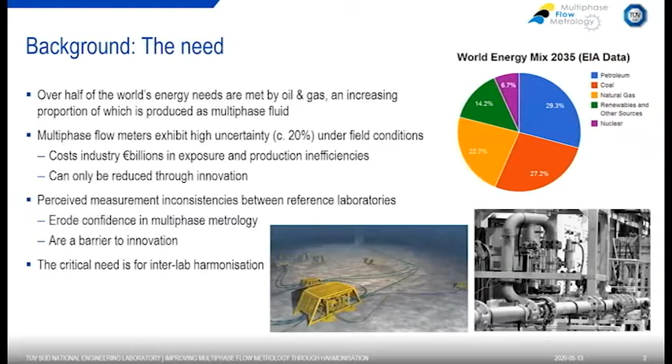This project is MultiFlowMet 2, Multiphase Flow Reference Metrology 2. It's funded by EURAMET through EMPIR, and it follows on from a previous project, MultiFlowMet. The aim is to establish a reference network of multiphase labs that are consistent and comparable, so that you can take a multiphase flow meter to any of the labs and know you will get the same results. This will lower the uncertainty of measurement and increase confidence in the use of multiphase flow meters.

Another aspect of this project is to carry out fundamental research to develop various modeling techniques for significantly improving the characterization of multiphase flows. As part of this, full-scale parametric experiments were performed to directly inform the analysis and testing for the intercomparison process.

The project started in June 2017 and ends at the end of this month. It includes an advisory board of stakeholders, including oil companies and regulatory bodies. There is a project website, just search for MultiFlowMet.

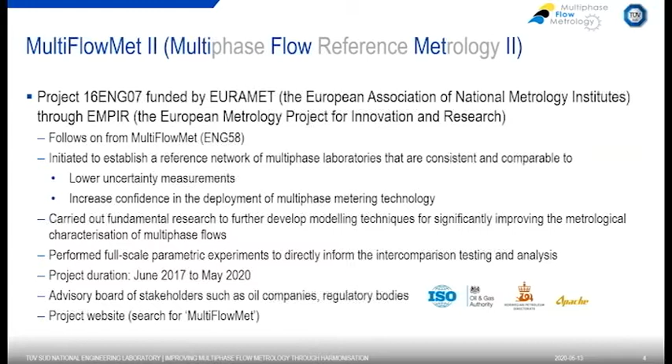The participants: in the UK, we have TÜV SÜD NEL Limited, who I work for, University of Glasgow, Coventry University, University of Leeds, Cranfield University, Industrial Tomography Systems plc, and Petroleum Software Limited.

In Germany, we have PTB and Rosen. In the Czech Republic, we have CMI. In the Netherlands, DNV GL. In Finland, VTT. And in Norway, Norce, OneSubsea, and Roxar Flow Measurement.

There are representatives from the National Measurement Institutes or designated institutes, which are VTT, PTB, CMI, and ourselves. The multiphase flow labs included are NEL, DNV, Norce, and Cranfield University. Overseeing the test work and analysis are the independent arbiters, from the University of Glasgow and VTT. The instrumentation developers are ITS, Coventry and Leeds universities from the UK, and Roxar from Norway.

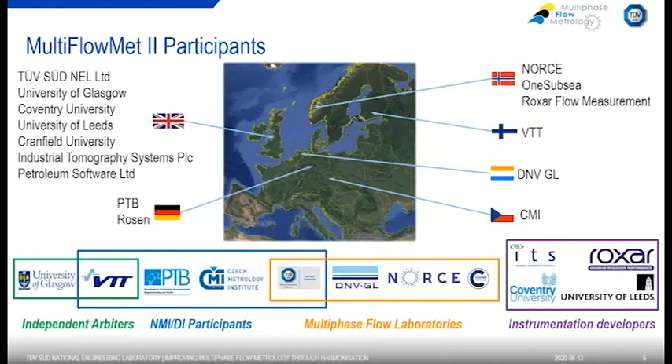The work has been divided into 4 technical work packages. Work package 1 is the preparation for the project, which involves the protocols, test matrices and methods, as well as the logistics for moving the instrumentation between sites.

Work package 2 is the intercomparison testing itself, to quantify interlab measurement consistencies or variances. Work package 3 is the research and modelling aspects, looking at enhancing the understanding of the character of multiphase flows. Both work package 2 and work package 3 feed into work package 4, the analysis, which combines the intercomparison measurement data with all the flow pattern evidence, the research and testing from the previous work packages.

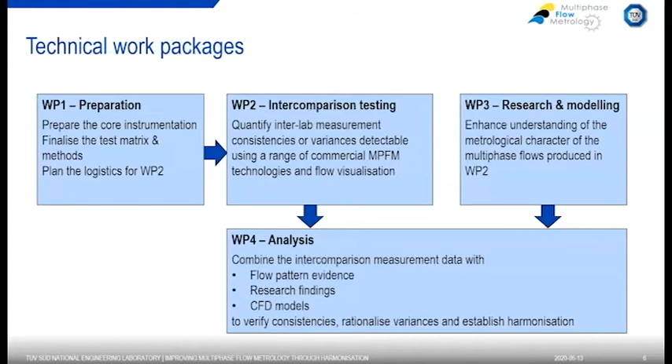To begin with, we'll look at the intercomparison specification, design, and instrumentation build, which is preparing the core instrumentation, finalizing the test matrix, and planning the logistics.

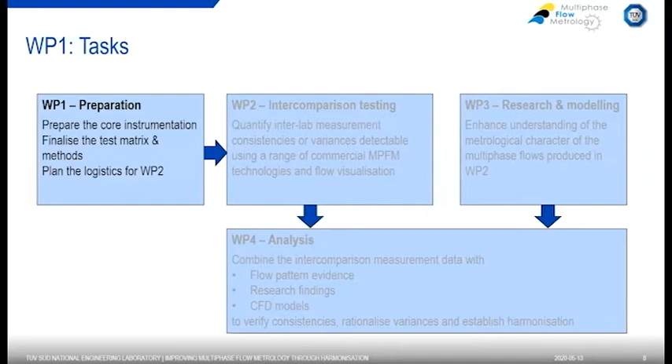First of all, we need to design what we call the transfer package, which is the instrumentation package to be transferred between the laboratories for testing, comprising the multiphase flow meter and the flow visualization equipment. Then there's a logistics plan for shipping between laboratories, which was non-trivial because it involved radioactive sources.

Then there's developing documents to ensure consistency. There's the test protocol as to how the tests were set up and run, including the roles and responsibilities for all the parties. Test facility uncertainty calculation methodology is very important for the analysis later on, and we devised test matrices for each laboratory, and of course data control for handling, storage, access and security aspects.

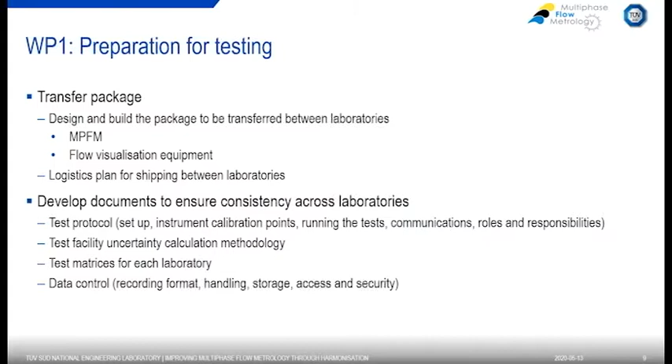So this is a drawing of the transfer package. The core is the multiphase flow meter, which is installed as standard within a vertical orientation downstream of a blind T.

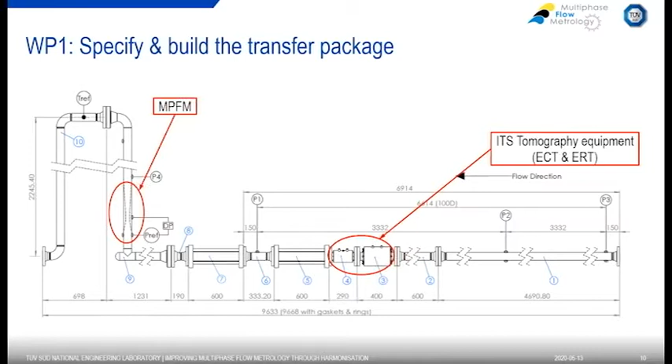As well as that, the blue pressure transducers were set to record at 40 Hertz to provide any additional information, and the green ones were reference pressures and temperatures that were monitored at all the laboratories.

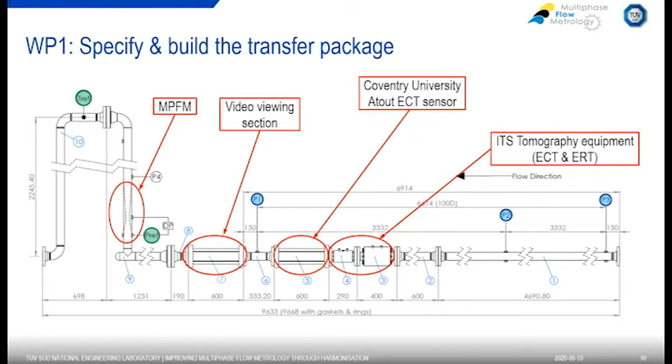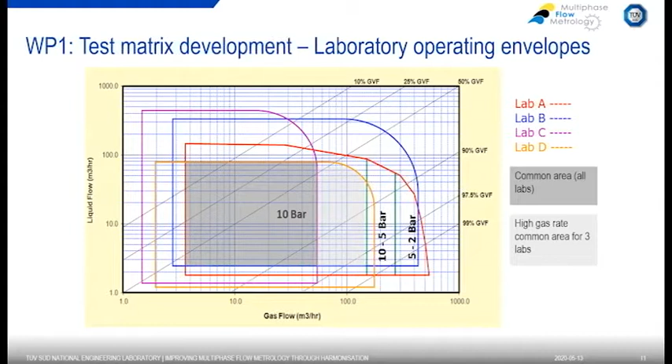Then superimpose on that lab B's capabilities, lab C, and then lab D, and then the common area. There is a common area for all the labs where the testing can always take place. But there's also another area of interest with the high gas flow rate, which is a common area for 3 labs in this case. Of course, it's important that any testing area can be tested by at least 2 labs.

And then from this, the test points are specified, and the number of points will depend on the available timeframes and budgetary limits.

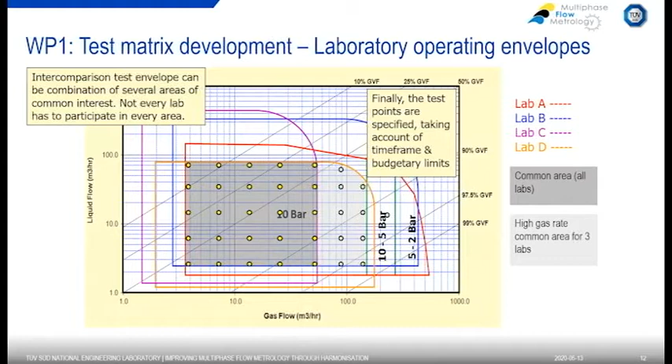For the laboratory fluids, all the labs were testing with nitrogen, and they were all testing with a sodium chloride solution of the same density. But the oil was different for each laboratory, so it's very important to compensate for the different oil characteristics to get comparable test matrices.

There was a lot of work done in MultiFlowMet I on matching dimensionless numbers. There's never going to be a perfect match between all loops due to difference in oil types and limitations in operating ranges, but focusing on matching the Froude number is the key aspect.

So there's the best match of Froude number via pressure, and matching the oil Reynolds number via temperature, using temperature to modify the viscosity of the oil. And then all the labs were using a set salinity.

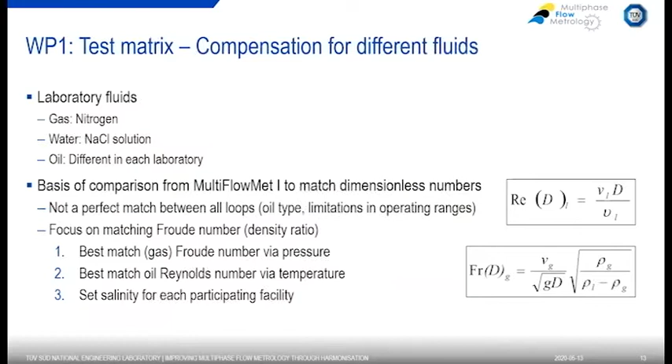For the flow pattern determination techniques, there were a number of different ways of doing this. In the transfer package itself, there was equipment from the industrial tomography systems, University of Coventry, and the high-speed video and the pressure recording.

The ITS equipment included electrical capacitance tomography at 100 frames per second, which measures gas and oil. The resistance tomography section at 800 frames per second measures the water and oil, or water in the non-conductive phase. And then there's software to combine this data to measure the full spectrum of gas, oil, and water phase fractions across the diameter.

The University of Coventry has the Atout electrical capacitance tomography section recording at 1200 frames per second, which is their research tool, clamped on externally around a perspex viewing section. We've also got high-speed video at 240 frames per second, the pressure recording at 3 locations at 40 Hertz.

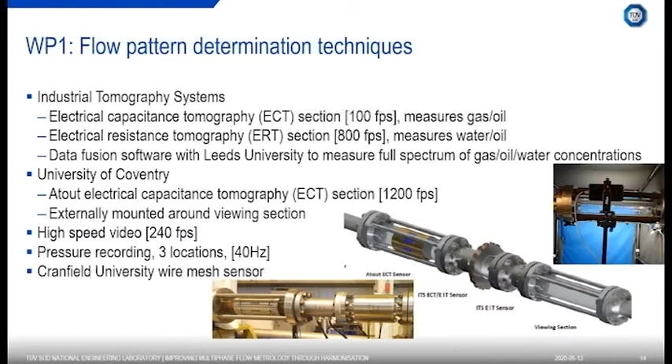Additionally, for the Cranfield University tests in Work Package 3, they used a wire mesh sensor as another tomography instrument.

So a little more about the tomography and the principle. Basically, sensors are placed around the pipe wall, and selective pairs of sensors are energized, and the field distribution is measured.

For electrical capacitance tomography, the sensors are not in contact with the fluid, and with the resistance tomography, clearly the sensors have to be in contact with a conductive fluid.

So both Atout and ITS determine the permittivity in the ECT for the oil and gas distribution, and additionally ITS determine the resistance for the water-oil or water-gas distribution.

They also have to take reference values for the test fluids, and then they use some extremely complicated mathematics to reconstruct the image from the values recorded. And from that, they get the phase concentration.

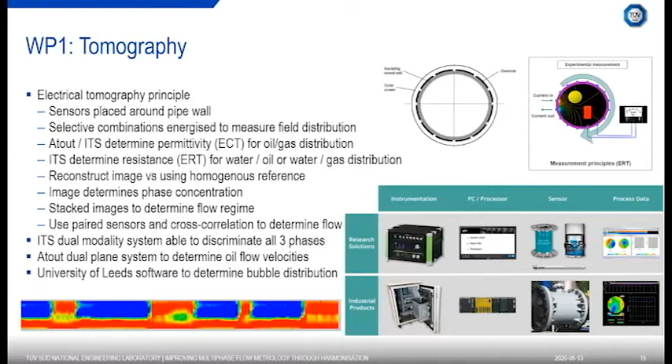Both ITS and Atout have research solutions and industrial products, and we were using the research versions on these tests.

One of the other aspects that we used was high-speed video recording. I'll play the video of this test in real time. It may well be pixelated when it comes across to you because it's a very big file, but you should be able to see the slugging flows.

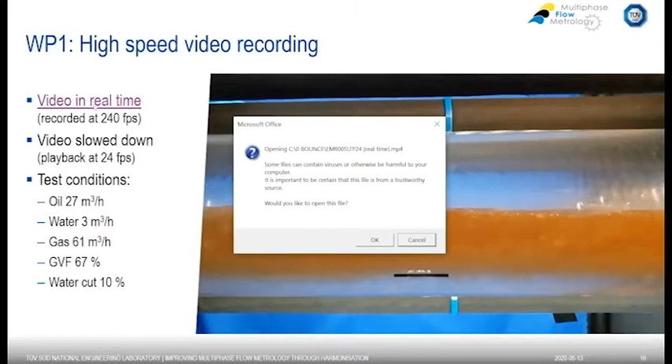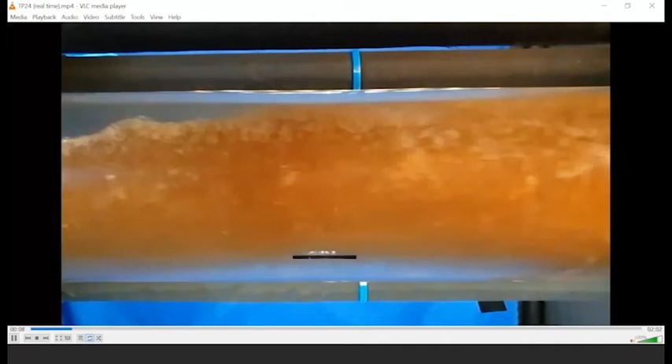So this is in real time. You can see the slugs passing through, and then the stratified flow in between the slugs.

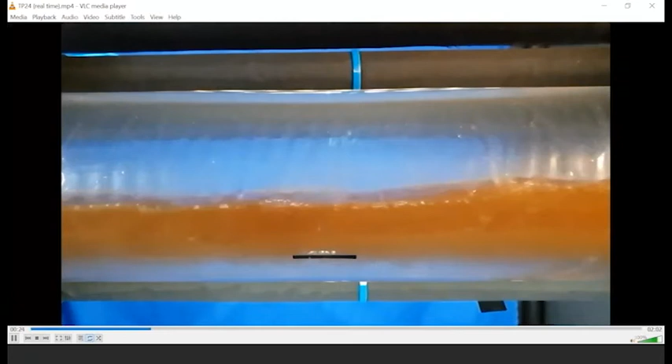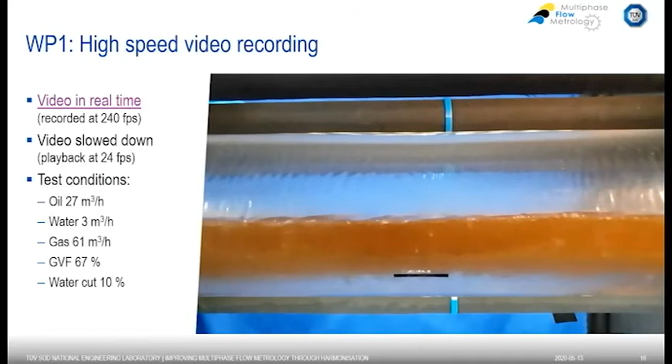And then this is the video slowed down and played back. It's the same test, the same video, playing back at 24 frames per second. Hopefully this will not be pixelated, and it gives a much clearer definition of the interface between the phases.

The test conditions here were a gas volume fraction of 67% and a water cut of 10%.

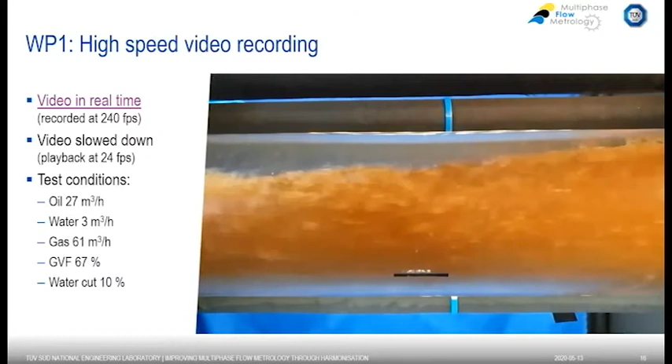So onto the intercomparison testing program itself. This was to quantify the interlab measurement consistencies or variances.

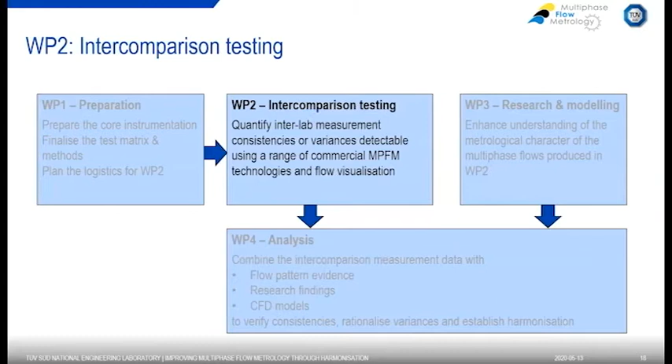The transfer package was built and commissioned at NEL, and the first round of tests was undertaken at our laboratories as well. It was carried out at 9 and 4.5 bar G and at a controlled temperature of 45 degrees Celsius in order to get the viscosity correct.

Once the tests were complete, the transfer package was dismantled and packed and dispatched to NORCE in Norway, where tests were carried out at 4.5 bar G and ambient temperature.

The rig was broken down again and transferred to DNV in the Netherlands, where they conducted tests at 8 bar G and at a controlled temperature of 18 degrees Celsius. Then the transfer package came back to NEL for repeat tests at the full test matrix at 9 bar G and 4.5 bar G as before, and at 45 degrees Celsius.

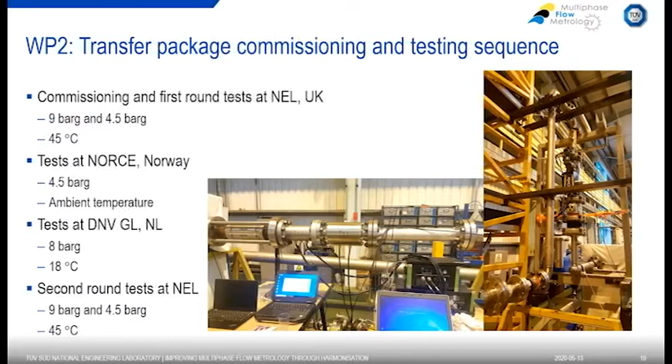The test matrices - the high pressure test matrix comprised 97 test points and was looking at a range of flows, as you can see on the right, from high to low gas volume fraction and from high to low liquid flow rate.

The low pressure test matrix was 48 test points and didn't cover quite as large a range. You can notice that some of the higher liquid flow rates are missing from the test range, and that was primarily because of the pressure drop through the transfer package.

The maximum flow rates achievable were determined during the first round of testing at NEL, and that influenced the matrix set points.

It was anticipated that it might be necessary to remove a number of test points from the test matrix during subsequent test rounds at the other laboratories if the test points were found to be outside their operating capabilities.

The intention was to run the test matrix in the same order at each participating facility to avoid the introduction of any additional uncertainties as a result of hysteresis of flow pattern development or transitioning from oil continuous to water continuous conditions. In practice, this was not always feasible due to the different operating principles at the three laboratories.

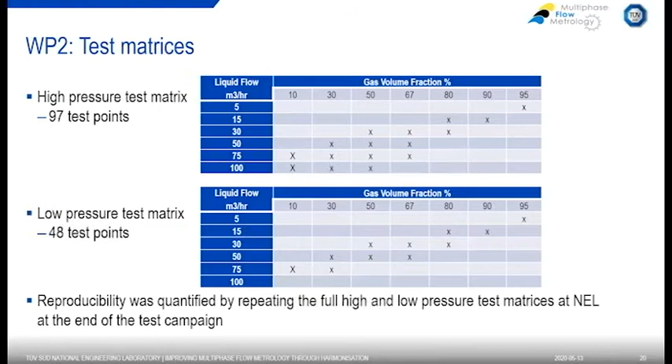Then on to supporting research and modelling.

This was carried out to enhance the understanding of the character of the multiphase flows and look at how it varied by altering different rig configurations, etc.

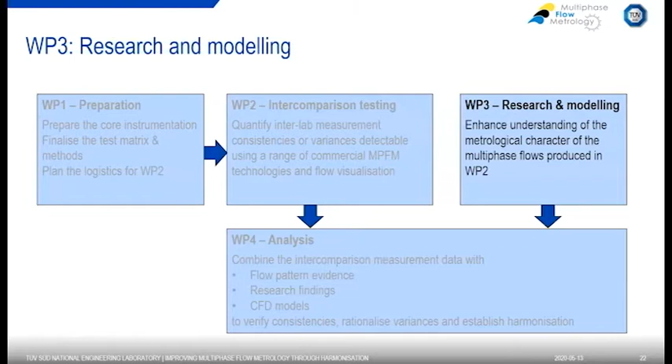So the points looked at were 0D, which was just upstream of the viewing section, 100D, 300D, and 600D. At each point where feasible, there was injection from the side and injection from underneath.

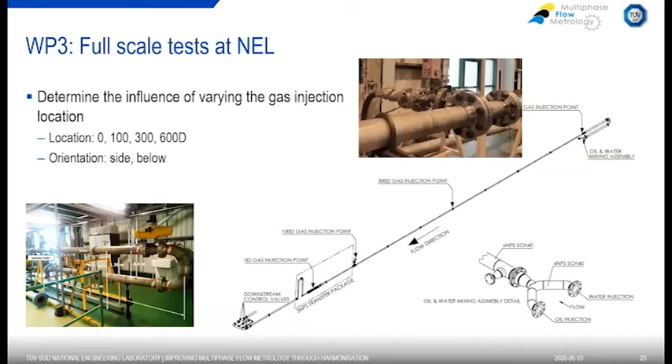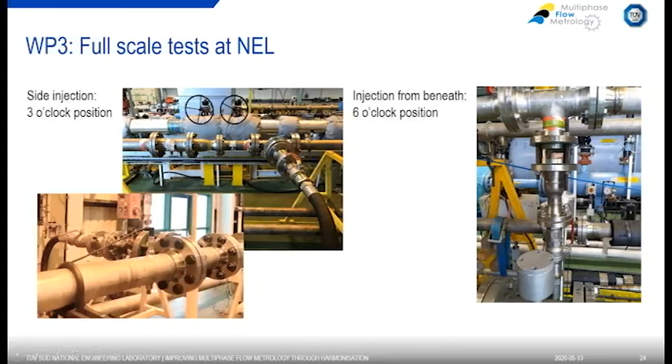For the full-scale test, the test points were selected from the intercomparison test matrix and were repeated at each gas injection point location. They were selected to give both oil continuous and water continuous tests, and were at 0, 25% and 75% water liquid ratio. The range of liquid and gas velocities were extended to cover the full range of possible flow patterns.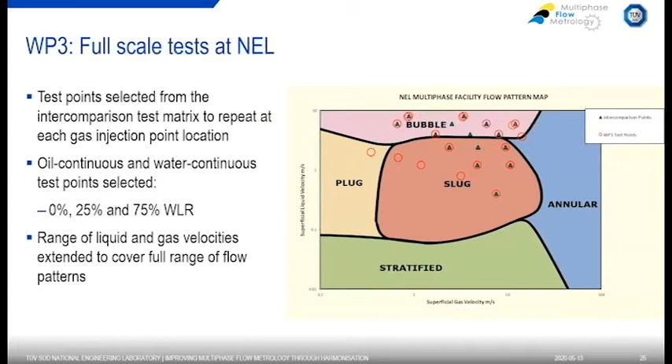Here's just a sample of some footage looking at the difference in the flow pattern between injection at 0D and at 600D. The difference is quite noticeable. For the 600D, the flows had a chance to settle down, and some of the droplets suspended in the gas have settled out.

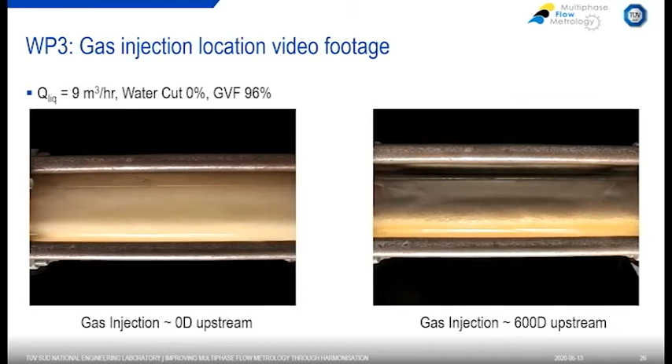And then this is just a video of another test comparing 0 to 100D and 600D visual results.

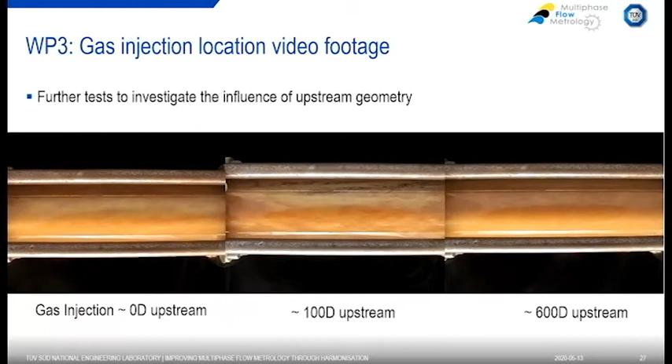The full-scale tests at DNV were to look at the influence of fluid density ratios. They replaced the nitrogen in the test rig with argon as being a much heavier gas, and the test pressure was increased to 33 bar to further increase the gas density. This gave quite a different gas-liquid density ratio, and they carried out a number of tests with those conditions.

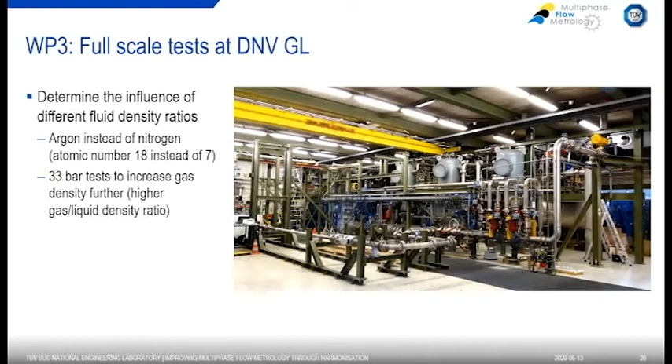At Cranfield University, they did some small-scale tests to replicate the full-scale setup. The pipework was all clear PVC. It's not quite as transparent as Perspex, but it does allow the flow pattern to be seen all the way through the test rig, and so throughout the model transfer package.

On the right, you can see the horizontal section approaching the model multiphase flow meter. The next picture, second from the right, shows where the multiphase flow meter would be. There's a blind T at the bottom, and then in the vertical section is mounted a scaled replica of the Venturi in the multiphase flow meter.

There's various different instrumentation in this rig. They were using ECT, electrical capacitance tomography, in the horizontal section, which you can just about see here. They have conductivity rings to measure water levels.

They've got a pair of wire mesh sensors. One can be seen at the end of the horizontal section of the transfer package, and there's also one near, just downstream of the multiphase flow meter, which you can't see.

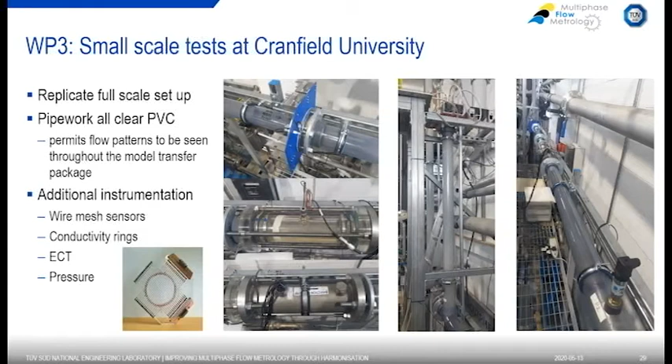As well as the experimental work, there was also numerical modeling work, computational fluid dynamics. The aim of the modeling was to validate against both the tests at Cranfield and the full-scale tests at NEL, NORCE and DNV, and to support the data analysis by showing possible reasons for any variances. CFD is a very time-consuming exercise, so a representative selection of model geometries and test cases was chosen.

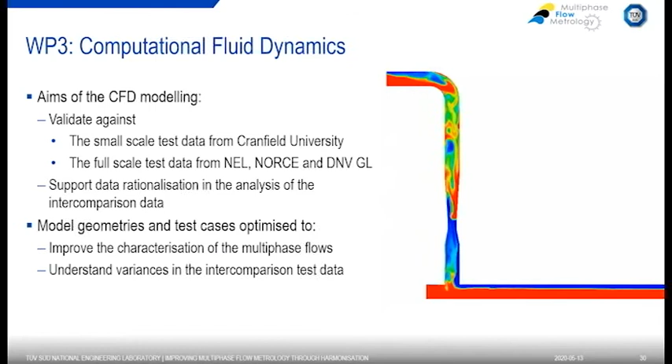So, to the analysis and conclusions. This is work package 4, and as I mentioned before, it combines the intercomparison testing and the research and modeling from work packages 2 and 3 to verify the consistencies, rationalize variances, and establish a harmonization between the laboratories.

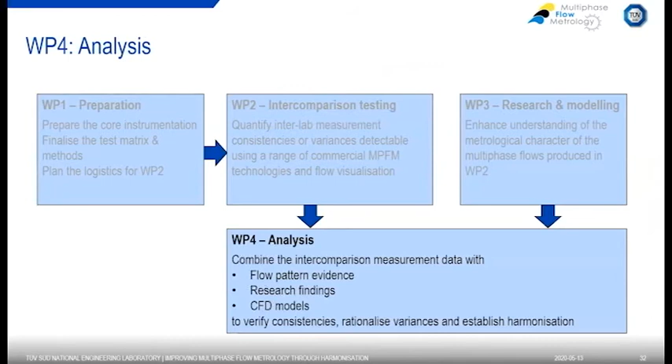For the tomography, a number of tools have been developed to display the results in various different ways. Both of these were developed by the University of Leeds. At the top, there's a bubble visualization tool. Usually, the classic way to display tomography is as a percentage of your phase: 0% is all liquid, 100% is all gas, and you get a rainbow color in between to dictate the void fraction.

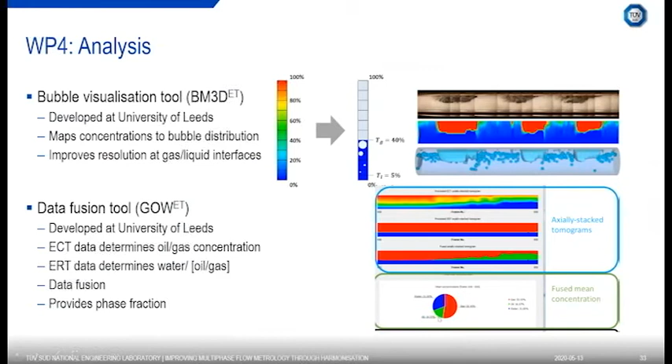If the flow visualization techniques can be analyzed and compared, we've got a video here of the tests and the CFD. This is some of the tomography results, and here are more comparisons of video against modeled results. The analysis combines all this information so that if there are any variances between the data, by looking at all these different aspects, you can generally find a reason why they don't match as closely as you would expect.

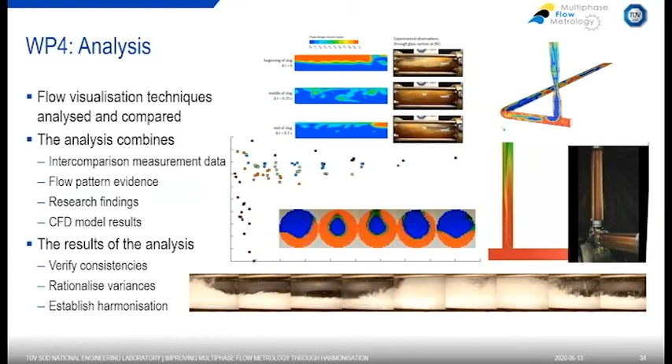The key to successful intercomparison is reproducibility, which is defined as the closeness of agreement between the results of the same measurand carried out under changed conditions of measurement. There are a number of changed conditions, which may be the principle or method of measurement, who's doing the measuring, what instrument you're using to measure it, the reference standards for your measurement, where you're doing it, the conditions of use, and time.

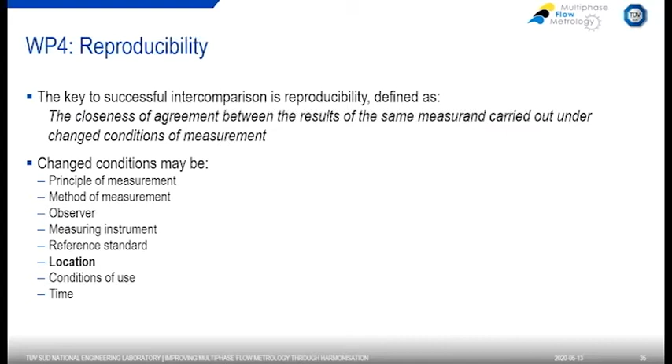One of these was minimized by following a test protocol, so everyone was following the same principles and method of measurement in the same way and using the same conditions of use.

The reference standard for the laboratories, the effects are minimized by additional single-phase tests at each laboratory, and these were used to double-check the reference meter uncertainties that were quoted.

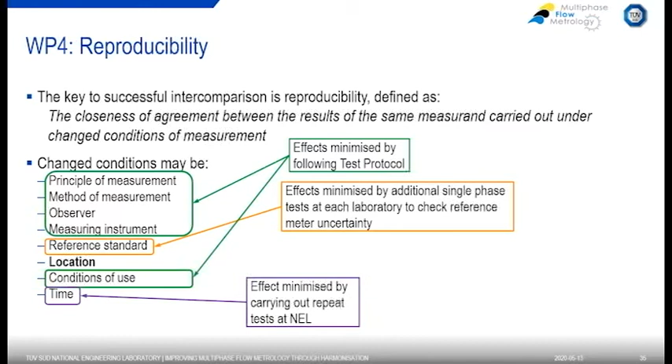As for time, the effect of doing the same measurements but at different times was minimized by carrying out repeat testing at NEL in round 1 at the start and round 2 at the end. And then location - this is the objective of this project, to show whether the effect of location can be quantified and minimized.

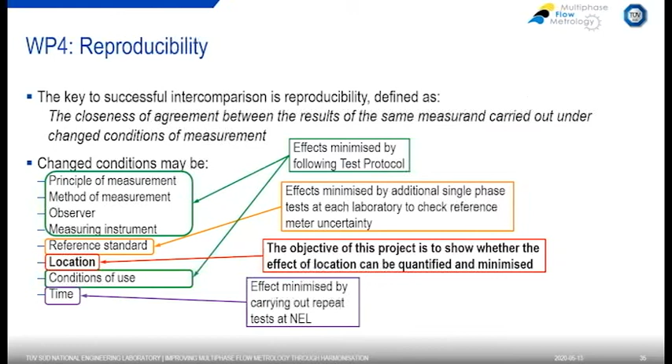Then the data from all this physical testing was analyzed. It was undertaken following an international standard for measurement methods and results, and the reproducibility uncertainty was calculated.

In MultiFlowMet 1, a comparability parameter was defined, and this has also been used in the intercomparison analysis for this project. There are various other statistical investigations looking at comparing flow meter deviations. The final stages of the analysis are underway, and published reports will follow, with further details in the workshops I'll talk about shortly.

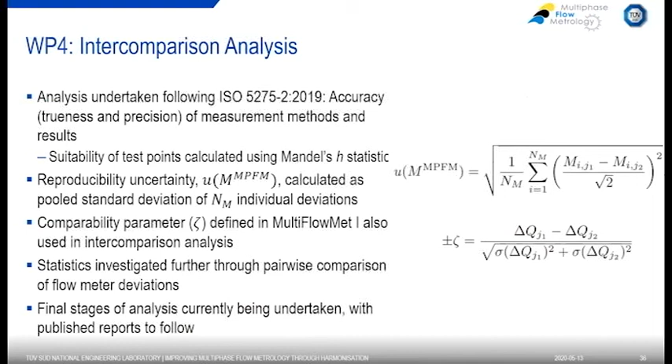So in conclusion, the multiphase transfer package was successfully designed, built, tested, and deployed at the 3 laboratories. The test protocol and the method of matching the conditions was found to be successful. The data comparison methodology has combined facility and multiphase flow meter uncertainties in a way that permits the facilities to be compared against one another without explicit reference to the performance of a multiphase flow meter.

A successful intercomparison was performed across a wide range of parameters: oil, water, liquid, gas. There were some unresolved anomalies identified in a minority of cases, and some variances between the laboratories for some single-phase flow conditions that could not be proven conclusively, though some possible causes have been identified. In a small minority of the gas comparisons, variances were again observed, with possible causes identified as line pressure and sensitivity to flow pattern.

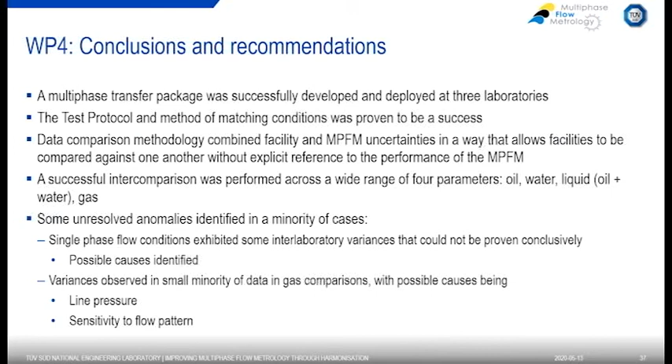One of the key aspects of all EMPIR projects is impact: how the information that's being generated is going to be used and disseminated.

For knowledge transfer, we've been able to disseminate work through the End User Advisory Group. We have a project website, there have been a number of conference papers and peer-reviewed publications, a case study will be made available, and there are good practice guides that will talk about the best way to conduct this experimental work.

Another important aspect is to contribute to standards, and there has been a report submitted to the ISO TC28 working group, which is drafting a standard on multi-phase flow measurement.

Another aspect is training, and this is being done through forthcoming workshops, webinars such as this, and also incorporation into academic work through the use of PhD students and researchers.

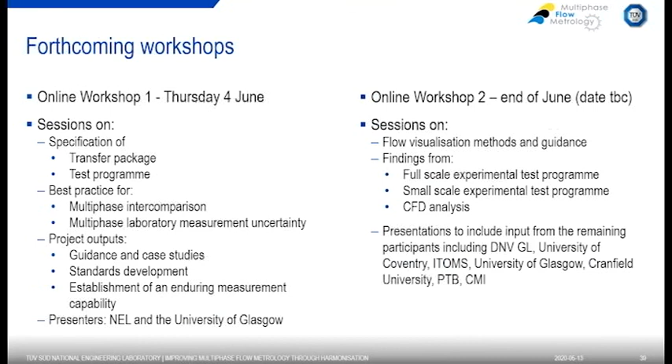I'd like to thank EMPIR for supporting this program. If you would like further details, please visit the MultiFlowMet 2 website, just search for MultiFlowMet on the internet, and register for the workshops.